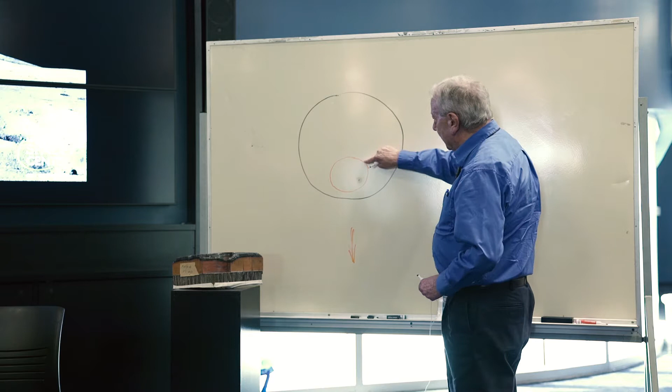And we're looking at something like 5K here. That's 5,000 degrees Fahrenheit. And then we have an isothermal, iso meaning the same, thermal line, maybe coming across something like this. Let's say 4K, okay? And maybe 3K back here, something like this. And this trails off to the opposite side at about 1,500. So if you want to go to the cool spot, you head to the back.

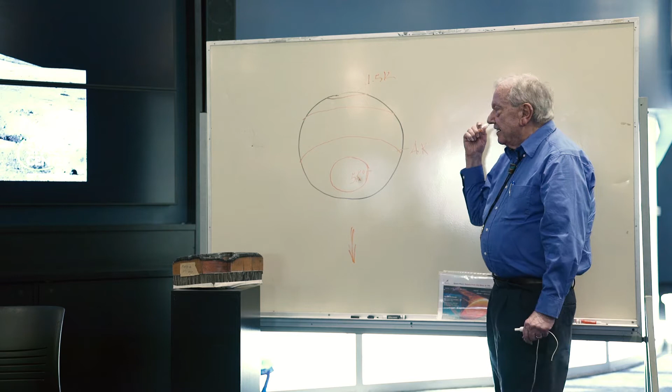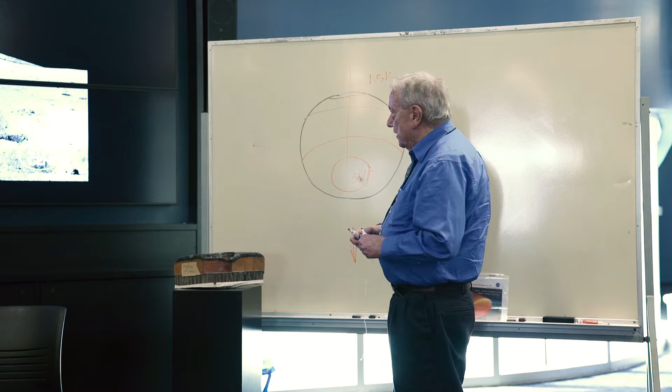Now, it turns out there is some symmetry here. There's symmetry right here, in that if we can solve the analysis on that symmetric line for the worst case, which is in here with pressures and temperature, we probably have a pretty good solution. But we don't have anything that will do this at this time. We're looking at the papers in the journals. We look at available structural analysis programs out there. There aren't any. We look at the universities, and in the 1960s they're starting to create all these great papers on shells of revolution.

And many of the items you find in stores and in pharmacies are shells of revolution under pressure, and you've never even thought about it. They're very fine for pressure, by the way. And this is in the right direction. It's against the forces. If it was in the other direction, it would be very bad, but it's in the right direction.

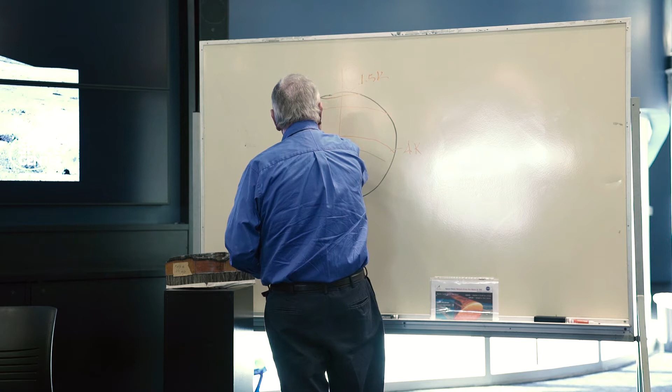Okay, so let's do the same thing if we had another color for the pressures. The pressures are going to be different, but there will be isopressures. These are the pressures. We have those. So those are the two loadings. What do we find unique about this situation?

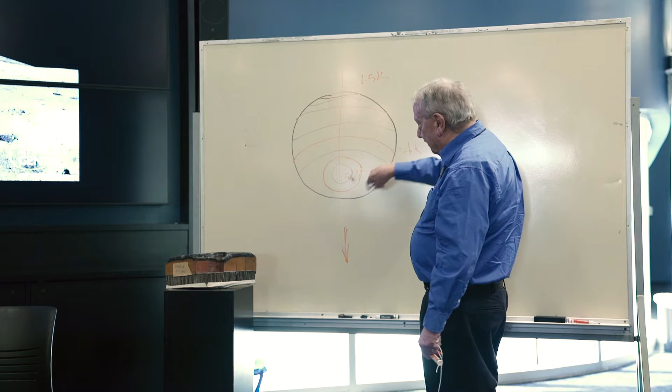We have a shell of revolution that has unsymmetrical loading. A shell of revolution with unsymmetrical loading. And there are no programs out there to do that. There are no finite element programs yet.

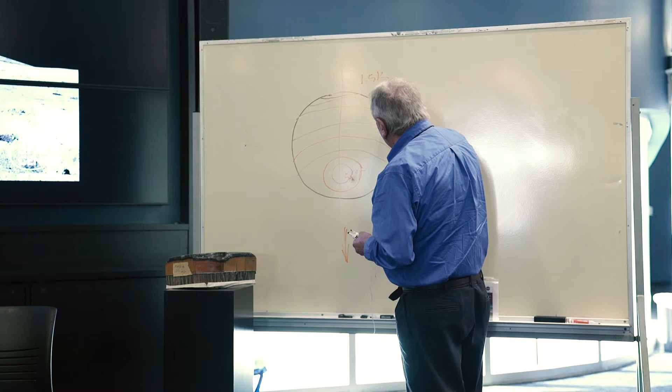Today they would take this, spin 1,000 finite elements over this, put pressures in every little triangle, describing structural stiffness at each of the little points, and solve it carte blanche with any kind of loading on it. Today they do the whole airplane. They contain finite elements of the whole airplane. But in those days we didn't, and so we had to think about how is this going to be solved.

What is happening is a surface of the command module is coming in through the atmosphere, and as this surface comes through, it is interacting with the air. So take your hands, put your hands together like this. And I want you just to do this. And as you rub that, you are creating something called friction. Now, as you apply more pressure, your hands are getting warmer. And the warmer they get, well, that can be a good thing, especially on a cold day.

But if you happen to be coming through the atmosphere at 25,000 miles per hour, and you've only got this thin skin of metal between you and your bottom, you can see where we need to control and understand that friction and that heat, which is the analysis that Ken and Ted were doing. As a matter of fact, deciding what kind of material this heat shield is going to be made out of has to do with removing all of that tremendous energy that's going to be created in the surface.

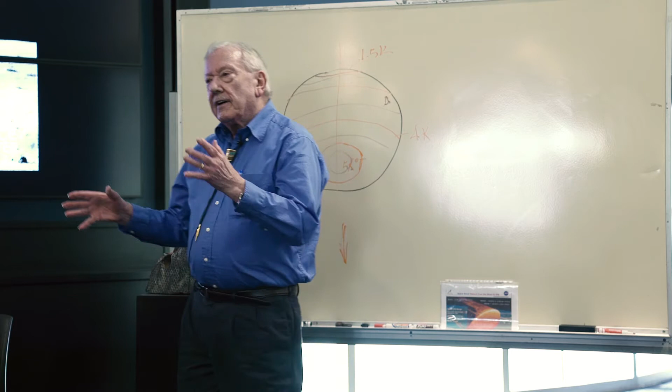And ablation is, I like the analogy of ablation to putting together a canister of ice going to the beach. And you put Cokes and your beer and everything with ice. And at the end of the day, the ice has melted, but the drinks are still cold. The ice has given up itself, the material itself, by latent heat. The latent heat has actually changed the product from ice into another form. Well, this is exactly what our ablating material on the heat shield is going to be.

The underlying structural part, the part that Ted and I were working on for the analysis, is this part and underneath it. That has the structural strength. We would not rely on the structural strength of the ablating material because it's a plastic honeycomb structure that has no outer face. So it has very little flexural stiffness resistance. All this structural strength will be taken by this stainless steel honeycomb. It's also honeycomb. Both of these are honeycomb. This doesn't look like it, but it's had this ablating material gunned into each of these cells. 3/8 inch hexagon cells. There are 370,000 of them over the whole Apollo.

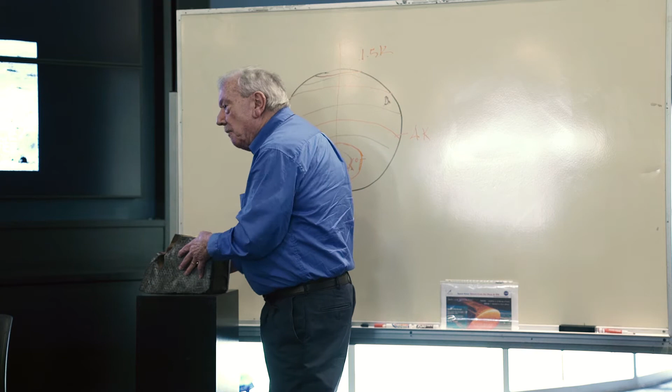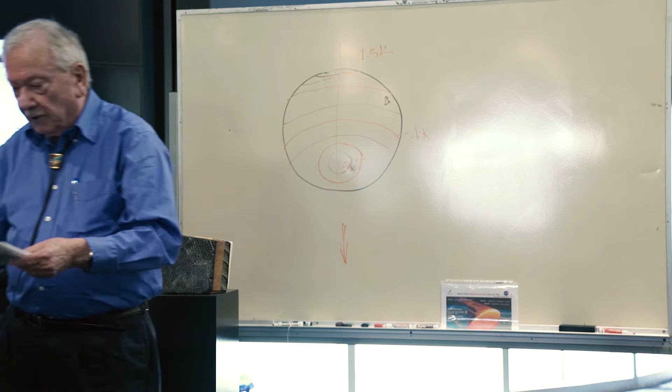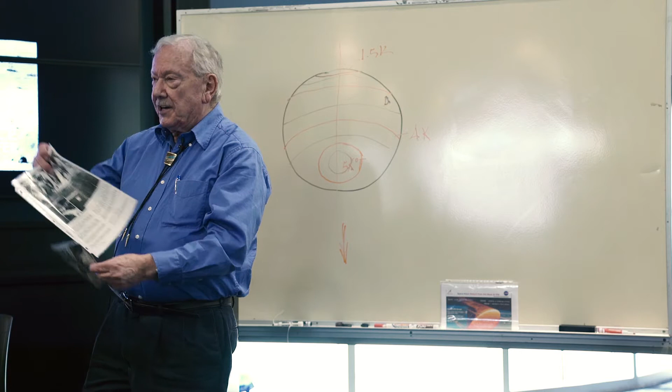And each one of these cells has to be gunned by a machine, by a person on each one. Each cell has to be gunned and filled, and it looks like this. This is the gunning done back at Lowell, Massachusetts, of a fellow gunning the ablating material into the hexagon plastic honeycomb. That's what it looked like. Every cell, one at a time. They have a production line here, showing them filling all of the cells. A very time-consuming process. They had to go to school for 2 weeks before learning how to do this.

If there are any questions as we go along, be sure to raise your hand. What exactly is the ablated material? What is it made of? It's an epoxy formaldehyde resin, and it's very, very viscous. It is so viscous you can slap it against the board and turn it upside down, it's not going to go anywhere. That's why it couldn't be poured in or spatulaed in or anything like that. It had to be gunned in with those guns, air guns, for every one of them.

And to make sure that it was done correctly for the whole shield, after the shield was done that way, they had to x-ray it and make sure that the bonds all the way down to the ends were satisfactory. Putting on the honeycomb itself on the stainless steel was quite a feat also. There's a plastic vacuum bag type of operation, and all the seals of the honeycombs against the stainless steel had to be very, very intact. It's very well done.

Why the honeycomb shape? Why not a triangle or a square or circle? It could have been other shapes, but I'll answer it this way. What animal can you think of in the world that has used a hexagon to put eggs in? It's eggs or honey, bees, millions of years old. What shape do they use? Hexagon. And a hexagon, because of the strength and volume. Strength and volume. If you think of volume, you just make it squares, right? Squares, all squares. But there's no strength in that. Bees making squared honeycombs, they wouldn't last the season, would they?

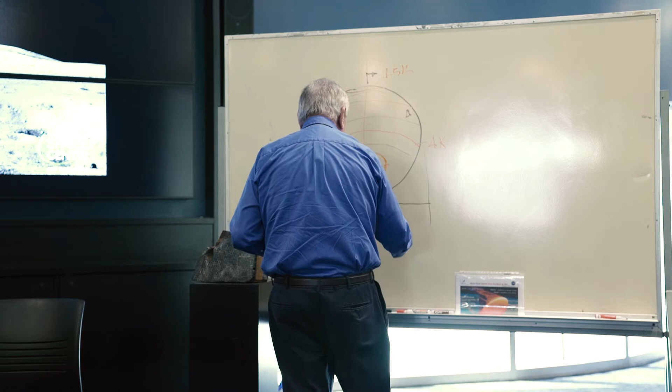It's a great question. The concept that you've just described is something we call biomimicry. Much of the engineering and the technology that we have today came from us trying to solve problems like this by going to the greatest engineering problem solvers in the world, Mother Nature. Mother Nature is solving problems all the time. The honeybees solve the structure problem with the hexagonal cell configuration.

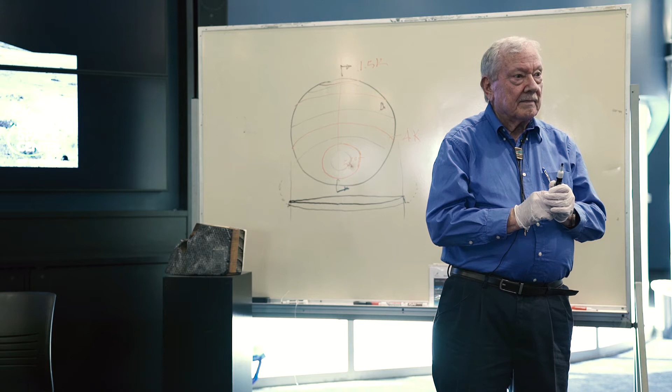Yes, sir. I have a question. So you were using some sort of tool and you were injecting the material into the honeycomb. From all the models and everything I've seen, that's like a completely smooth surface. So was it cartridges, or was it calibrated so it puts in, say, 3 inches and then smooths it down, and that's how you got the uniformity?

When it was gunned in, I showed you the picture of the gunning. It actually spills over. This is a typical gunner gunning the material in. Very, very viscous, so viscous that you can't put it in any other way. You have to have pressure behind it, and you pump each of these cells individually, and it sticks out, and it doesn't look very good, right? It's a reddish brown material, and it looks pretty bad, but it cures. And after heating and curing, it gets extremely hard, and they can grind it.

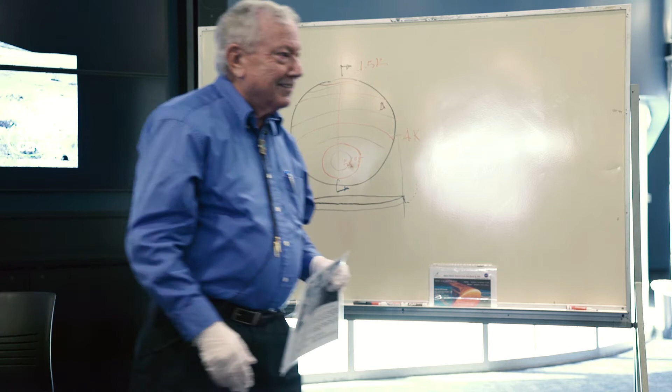Can you pass that around? Sure. It's hard for us to see from way back here. Oh, yes, I'd be glad to. You bet. Okay, here, this way. You crazy guys. Go ahead, pass it around. If you see anything that you'd like to see, we'll pass everything around. Be glad to. Okay.

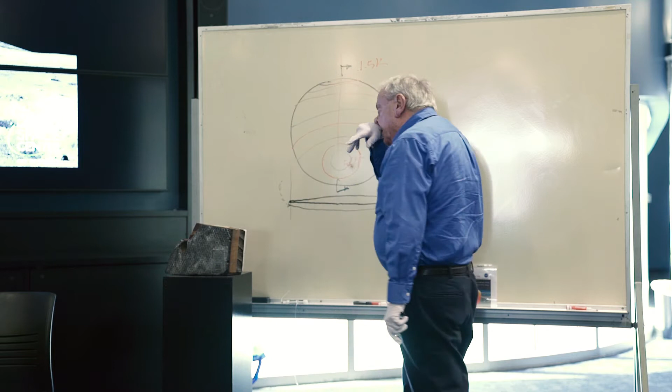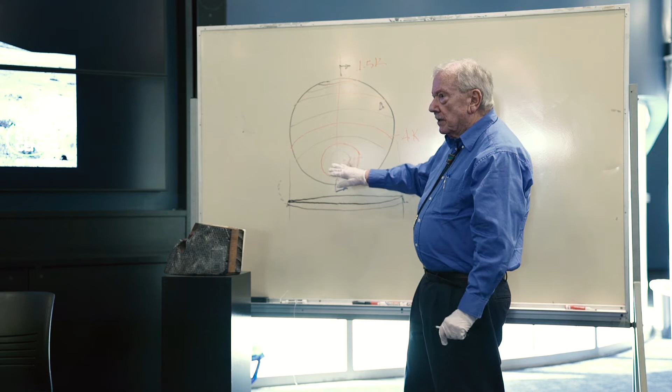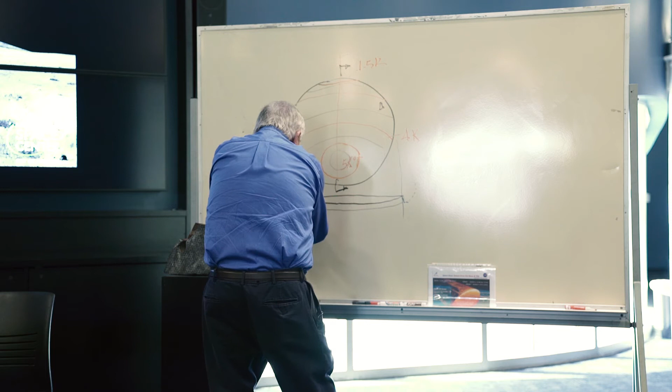Now, we're going to take a slice here through the center, the most interesting center, because that's where we're thinking the maximum pressures and temperatures are going to be on that axis. You can see it spilling over to this side, spilling over that side, probably in this region. So we have the honeycomb, and let's put another. These are greatly exaggerated. And we'll put another one out here like this, and this is this end right here. So you see it's thicker. It's thicker, so I'll bring it out here like this.

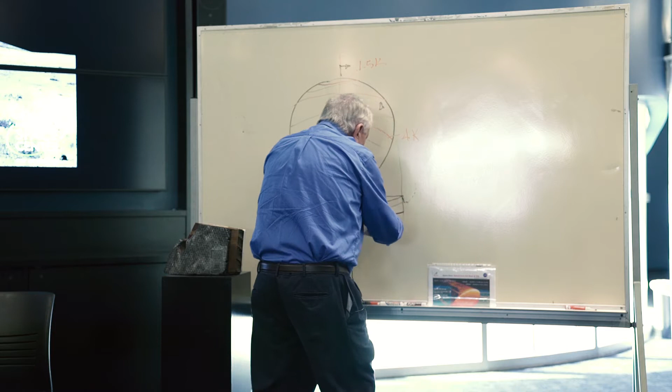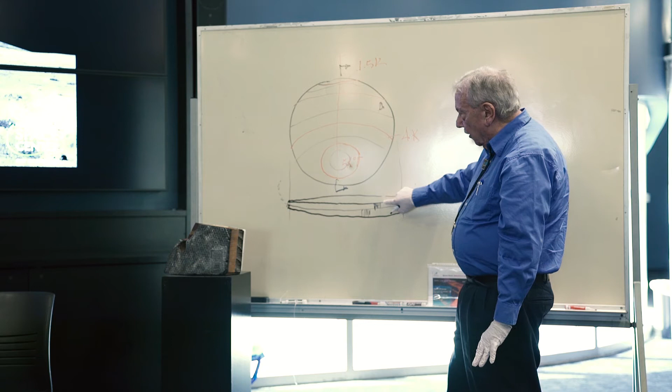Okay. This is the honeycomb stainless steel. This is the honeycomb resin, plastic resin. Good bond, super bond. All the structural strength in the shell, stainless steel shell, and all the ablative material on the outside. And you can see here, coming back with Apollo 4, how much was left over? And Jerry can tell us an experience about that.

So, again, in principle, the theory was, as the spacecraft enters the atmosphere and starts coming back in, there is something we call the angle of attack. If you take a center line through the spacecraft, and now this is the atmosphere, so it's coming through. If I increase the angle of attack, which means I drop this surface down, this whole base heat shield is being exposed and is heating up with the friction that we saw as it comes down through the atmosphere.

Now, we know it's going to heat up, and we know that the ablative material is going to help protect us for a while, but we have to time it carefully, because if we increase the angle of attack, we're gonna have the heat from this friction only on the surface for less amount of time, because it's going through the atmosphere quicker. So as it comes through the atmosphere, it gets hotter, but it doesn't last as long. So now, can I hurry up and get through there before it all wears away? That's the decision on the angle of attack.

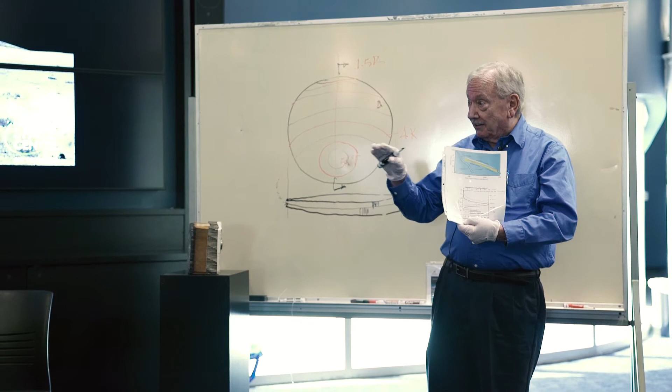I've got another drawing I'd like to pass around to you. It shows you the corridor that Jerry was just talking about. Here's the space shuttle, and it shows you altitude versus the time for reentry. I've always wondered, when you hear that it's coming back from space, how long did it take for the Apollos to splash down? Turns out they were almost all the same. The Apollo 11 was a little longer because they wanted to go over some clouds in the ocean, and so they increased that angle that you were talking about and went another 30 seconds to that side. And Apollo 15 had only 2 parachutes, so it had 30 seconds on the short side.

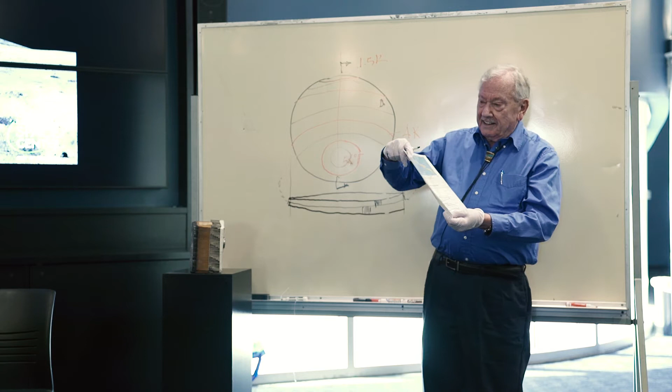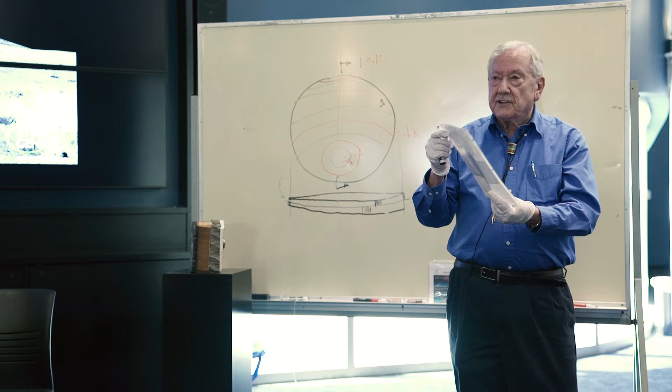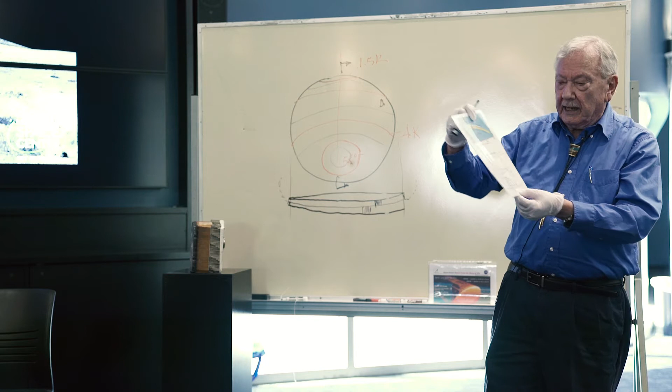But it shows time versus the re-entry in seconds, and it shows also the stagnation point and the deceleration and the pressure as a function of height. For some reason, NASA chose 400,000 feet as the place to start. That's about 76 miles, almost 76 miles, as the amount of molecules now starting to hit it. And these curves probably came from the Arnold Engineering Development Complex in Tennessee. It shows the value of the heat, the flux, the deceleration, and the pressure as a function of the height.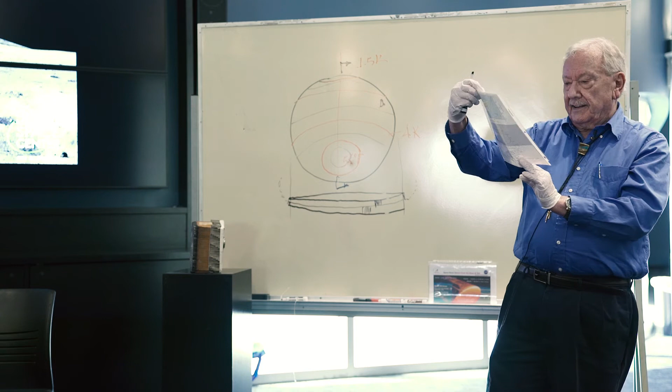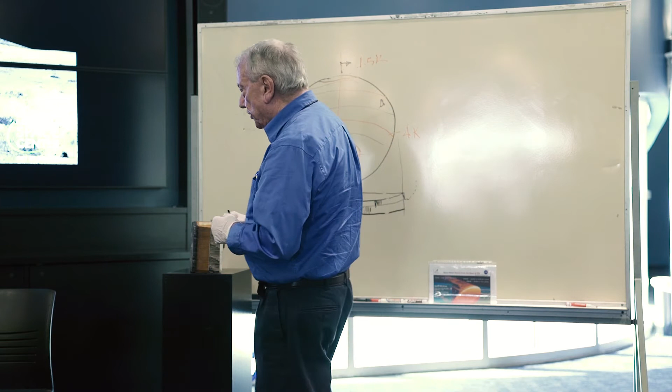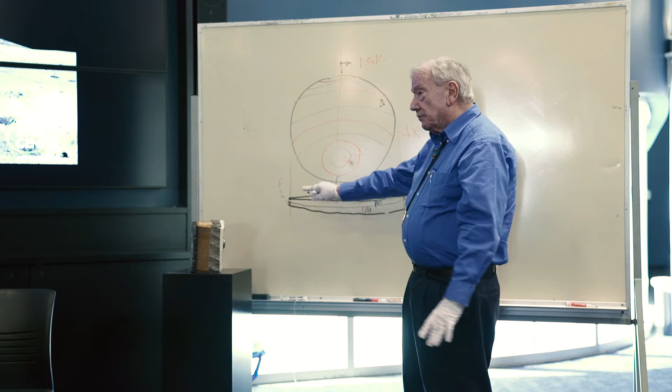I'll pass this around and you can check that out. Some of those numbers will stick with you. One of them is 25,000 kPa pressure that we're going to use here to test the Apollo. So anyway, this is how it was built. The stainless steel was made at Armco in Ohio.

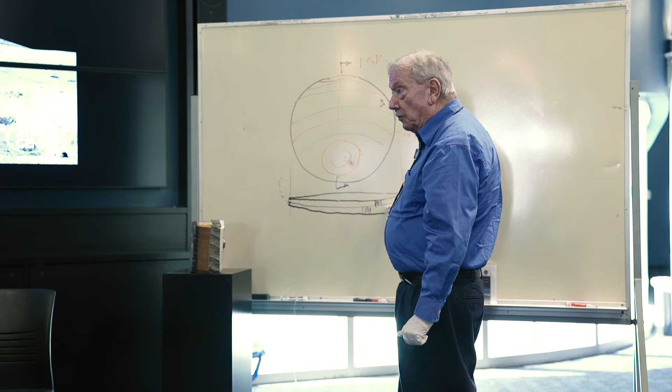The ablative portion was made at Avco for Avcoat. That was in Lowell, Massachusetts. And these parts, the panels, were being made here, but they were being sent all over the world, getting their new coverings, ablative materials, attachments, that sort of thing, and then brought back to Downey here to be assembled for the command module.

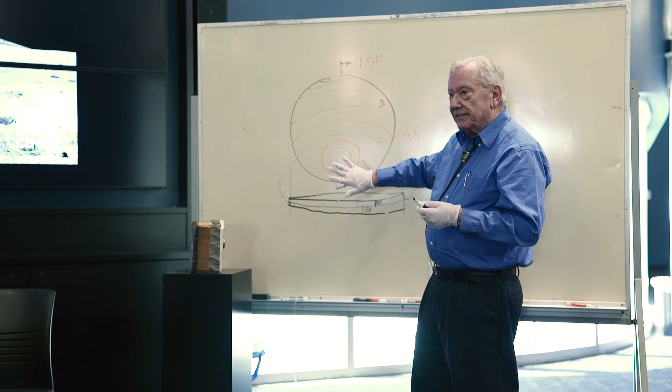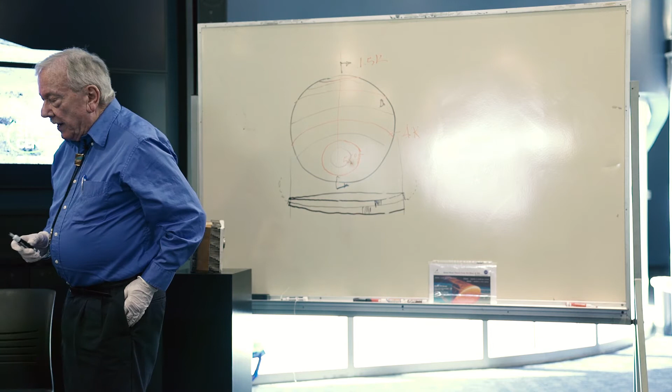Well, the problem is we have a shell of revolution for which we have a lot of analyses, but we don't have any analyses for a shell of revolution that's imposed by unsymmetrical loads. So what do we do? Well, Ted and I and Dr. Capelli wrote some papers using a program that we programmed right here, maybe 1,000 yards from here, in Fortran 4, that would predict these events in the shell itself.

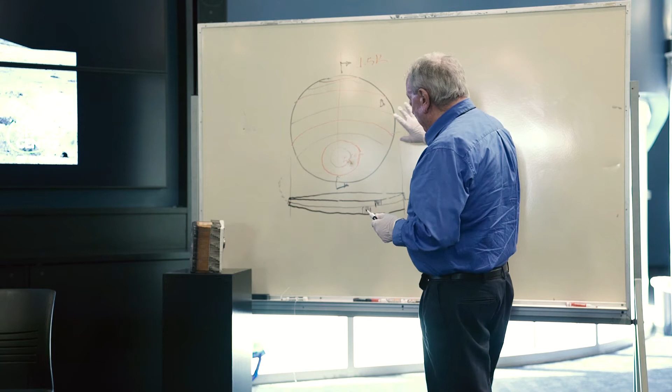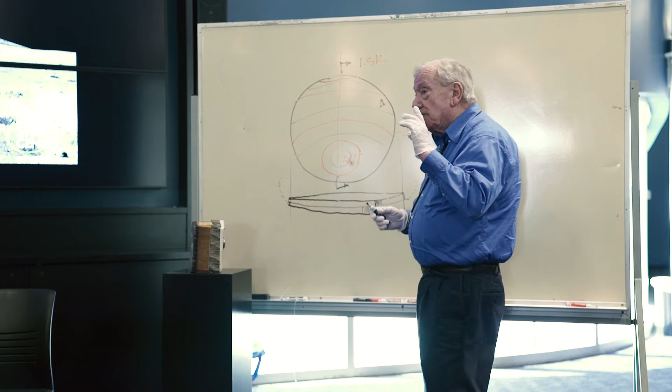And the way that was done was, and this is a little technical, and my son will help me out here if I'm wrong, but there are equations of motion, there are equations of boundary conditions, there are equations that describe the characteristics inside of the shell. And it turns out that the stiffness, the thickness, one of the major elements of the stiffness parameter, which is D is equal to E, the Young's modulus, times I. Structural stiffness is equal to Young's modulus times the area moment of inertia.

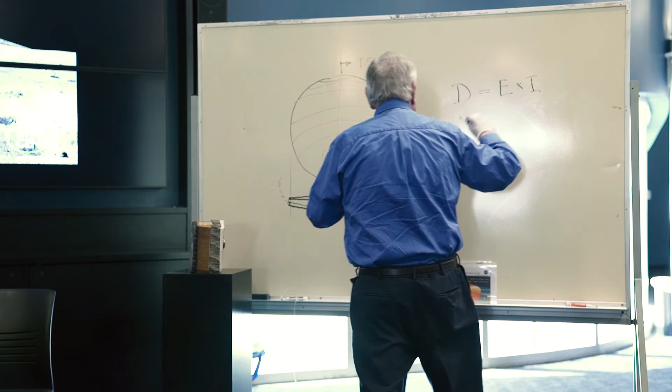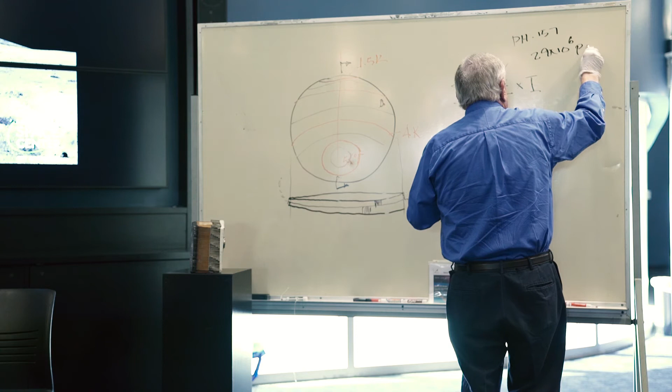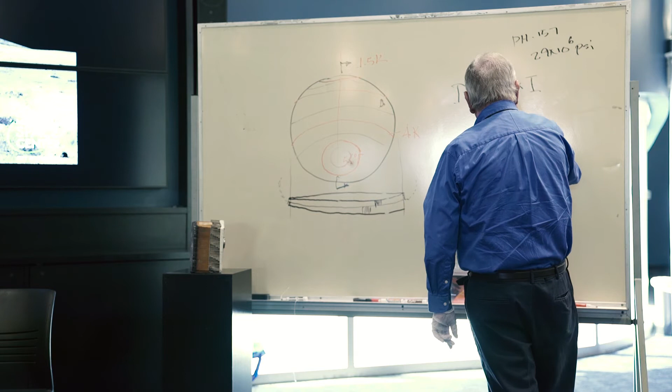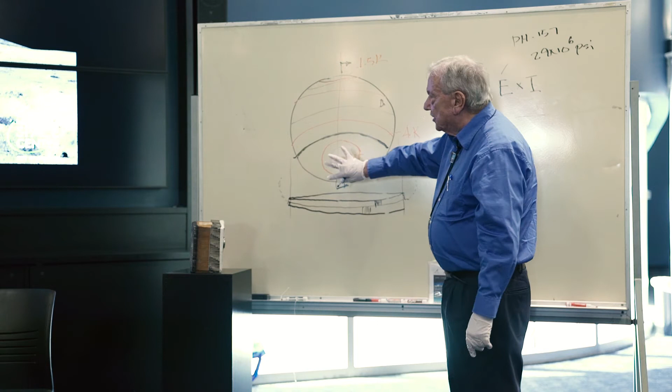And E for PH 15-7 is 29 times 10 to the 6 psi. And I is calculated for a sandwich structure. I won't go through the details, but here's the typical position. We're saying this was one of the chem millings that takes place that makes this stiffer, less stiff, less stiff, less stiff. And so it reaches a juncture like this and goes on. It reaches another juncture and goes on. We have another sheet down here. We have a honeycomb. And so you can calculate I for this kind of configuration.

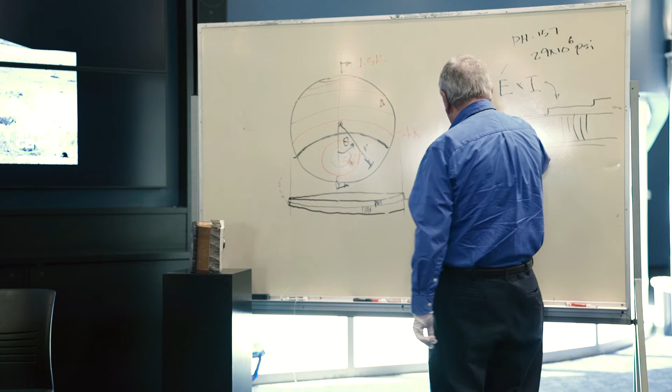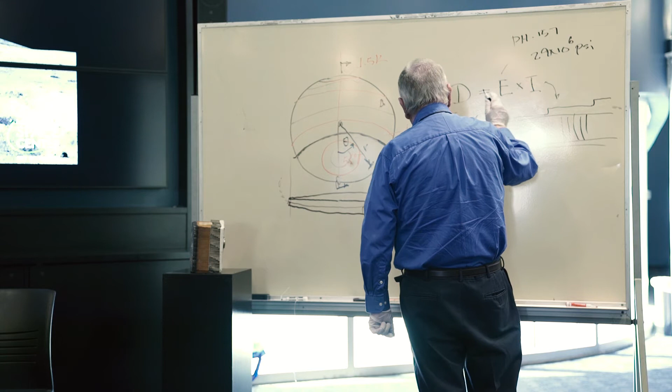But it varies. If we take a point here in the center, and say this is theta, and this is R, any position on the shell, then its stiffness can be represented as a function of theta and R. And temperature will be in here, but we're not going to deal with temperature. But this is how structural stiffness varies any place that we're at.

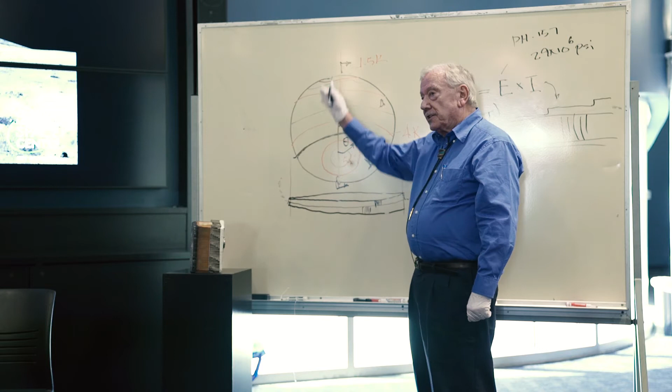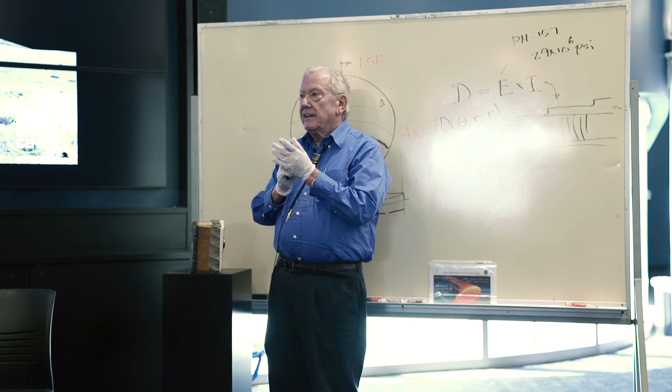Now, if we're symmetric, if we expect the loads to be maximum on this plane of symmetry, then what we can do is expand this term in what's called a Fourier series. If you want to get an idea what Fourier series is all about, I highly recommend you do this. Just go to Wikipedia and type in Fourier series. It's a magnificent explanation of what the Fourier series are. And that is expanding any function, two-dimensional function, as a sum of some coefficient and a sine and a cosine.

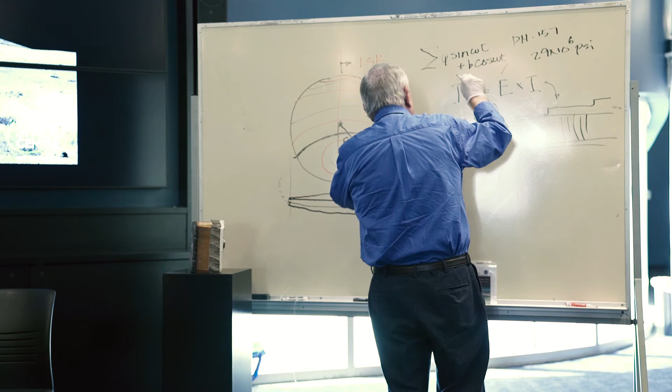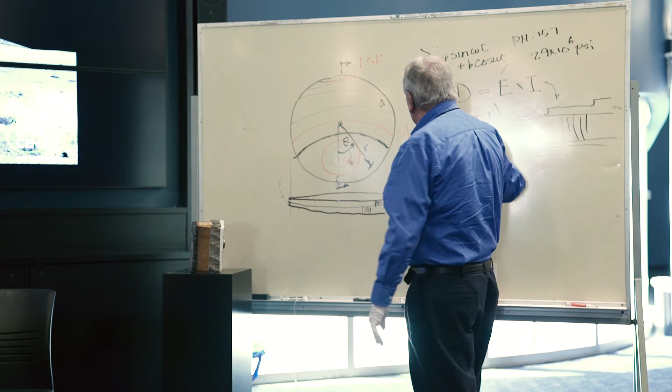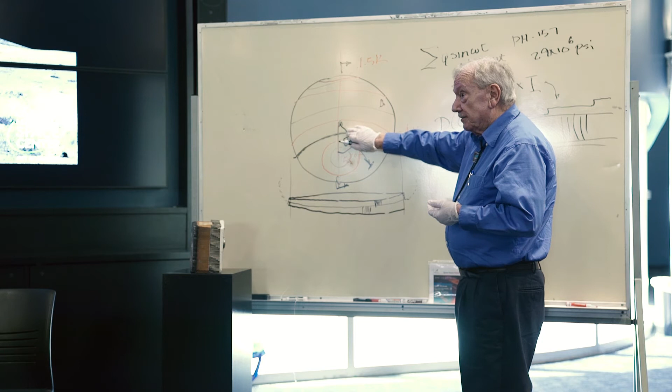But it turns out we have a plane of symmetry for the stiffness. We can do away with one of these. But we can expand this function now anywhere on the shell. And this is used in the equations of motion for the shell itself. I know that sounds a little confusing. But that's the way Ted and I did it.

The problem was back in the 60s, we didn't have machines big enough for the base of this heat shield. So we developed a new process. It was called chemical milling. So if you take certain metals, for example, if you take aluminum and you stick it into a beaker of hydrochloric acid, the same kind of acid they pour in your swimming pool to keep the bugs out of it, it will dissolve. The hydrochloric acid eats the aluminum and takes it away.

So in our lab, we said, wow, you know, if we could control that, we wouldn't have to mechanically machine these parts. And we did. We developed a process called chemical milling. We could take a piece of metal, we could mask it off in certain ways, we could dip it into a tank of acid or chemical, and it would eat off everything that wasn't covered.

And if you could control the geometry of that and the timing, we could reduce weight, we could control dimensions, we could create a floor that had different thicknesses in it. Chemical milling became a wonderful process for the Saturn V hardware, for the Apollo hardware, and for other applications.